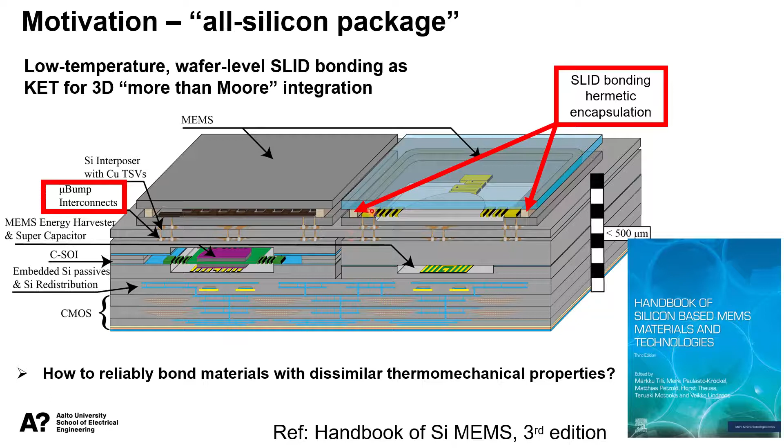Why did we decide to study the copper-tin-indium ternary system? It is well known from development of low temperature lead-free solders that indium has a stabilizing effect on the liquid phase. Based on the available thermodynamic description of the ternary system, it is possible to evaluate the effects of indium additions to the copper-tin system on the interconnection microstructures as well as processing capabilities.

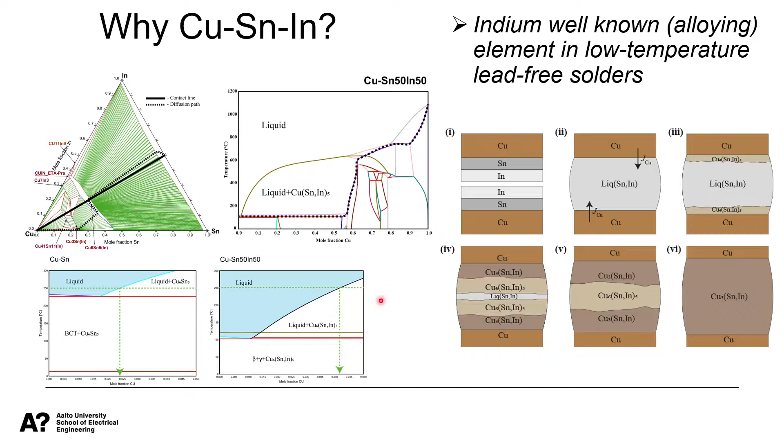Moreover, we can also see that when the liquid phase is completely consumed by the chemical reactions during the bonding, the remelting temperature of the interconnection should increase up to 600 degrees centigrade. Therefore, we expect that the bonding should be possible at temperatures around 200 degrees centigrade, but still we should achieve interconnections which are thermally stable up to 600 degrees centigrade.

In this test batch we had two different types of structures. The symmetric structure, where copper, indium and tin were deposited on both wafers, and the asymmetric structure, where tin and indium were plated only on the cap wafer side.

The bonding trials were mainly successful, so we were able to achieve high quality bonds down to 25 micrometer bump sizes and temperatures down to 200 degrees centigrade. However, there still remain some challenges related to the smallest 10 micrometer interconnections and alignment marks. These challenges were due to our photolithography and etching processes.

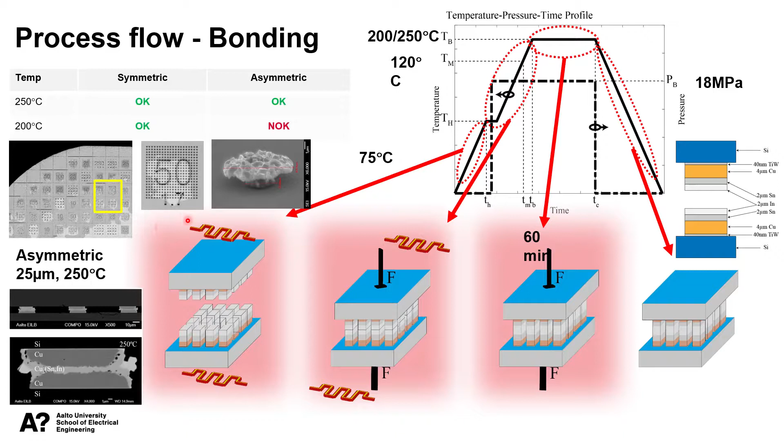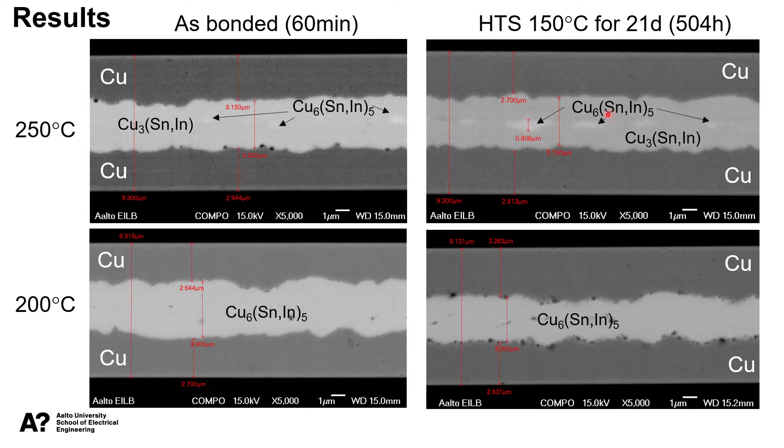An interesting phenomenon was found when we did some solid-state annealing, and we observed that these microstructures seem to be extremely stable against thermal treatments. Here we see the microstructures after 500 hours exposure at 150 degrees centigrade, and we cannot observe any microstructural changes. In fact, similar results we have obtained also after 1000 hours.

So to conclude, low temperature wafer level copper-tin-indium SLID bonds were successfully fabricated, with bonding temperatures down to 200 degrees centigrade. In mechanical tensile testing, we didn't observe any failures which would propagate through the actual interconnections. All failures were adhesion failures at either the silicon/TiW or TiW/copper interface, and the fracture strength was higher than 25 megapascals.

We still had some test wafer manufacturing related challenges in our lithography and etching processes, so that the bonding of the smallest 10 micrometer features could not be verified. In addition, the asymmetrical 200 degrees centigrade bonds failed. The addition of indium to the traditional copper-tin system seems to significantly stabilize the microstructure, especially the Cu6(Sn,In)5 phase.

Since these preliminary results are very promising, further studies will be towards even smaller microcontacts and thermomechanically more challenging applications like bonding silicon MEMS or MEMS components to glass, sapphire or germanium caps. In addition, functional and mechanical reliability performance needs to be verified.